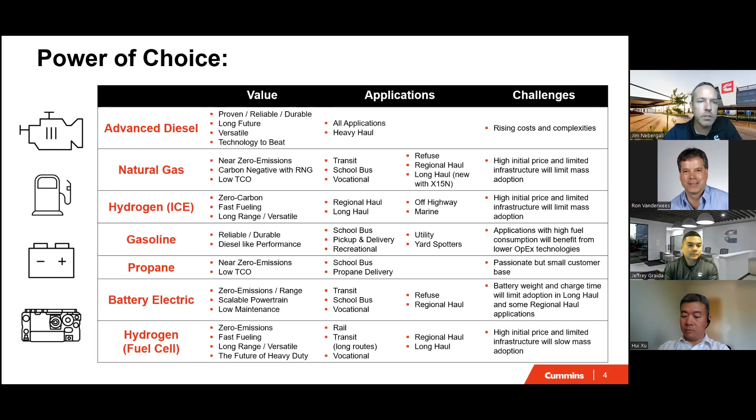We are investing in a number of different powertrain technologies: advanced diesel, natural gas, hydrogen internal combustion engines, or ICE - you'll hear us use that phrase throughout the package as shorthand, since internal combustion engines is a mouthful. We're also investing in low NOx gasoline engines, propane engines, battery electric, and hydrogen fuel cells.

It's important that we recognize the diversity of investments we're making, because you are all going through very similar things yourself. There isn't a single solution that will be the power provider of the future. It's really hard to replace diesel - it's quite versatile. So it's going to take an array of solutions, as well as low carbon fuels, to achieve the climate change goals we're all trying to achieve.

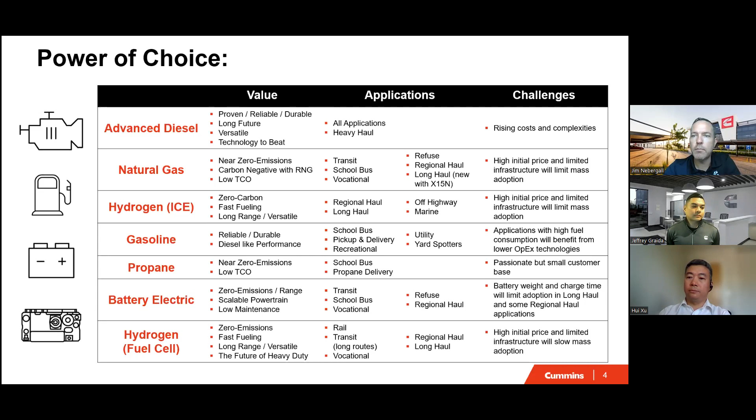Hydrogen fuel cells have 100% tailpipe reduction of CO2. It also has 100% reduction of NOx emissions. It is also more efficient, in the 10 to 15% range from a fuel bill perspective. So it is a great technology - there's a lot of value in hydrogen fuel cells, and it's one of the many technologies Cummins is investing in.

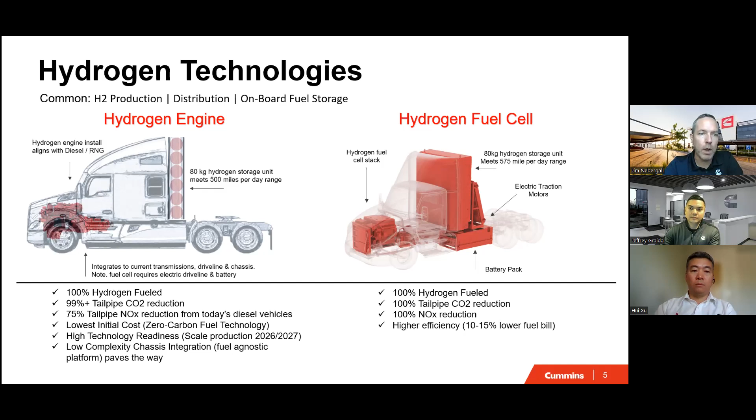The final comment I'll make here is that you'll see a number of images of North American Class 8 trucks in the package. That's just because that was a graphic that was available, but it's also an area of the market that's developing quite quickly. That doesn't mean the technology isn't applicable quite broadly wherever diesel engines are used, and we'll be talking about that as well today.

So Cummins has announced that we're working on two hydrogen fueled internal combustion engines, a 6.7 liter and a 15 liter, for global on-highway and off-highway markets.

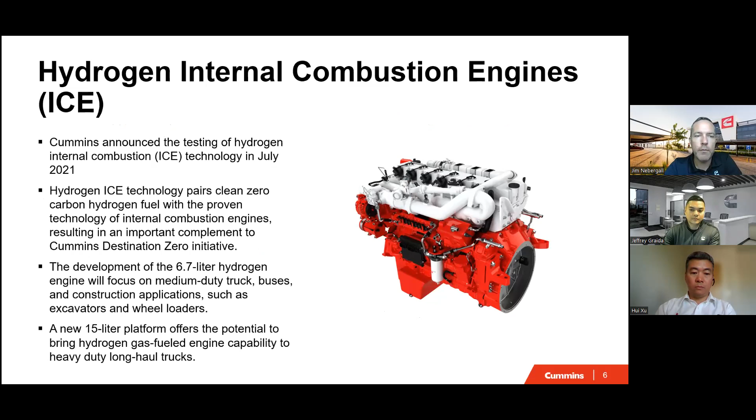And as we look at this technology, you ask why, why are we doing this? Essentially, Cummins and the industry are all working towards a common goal, and that's decarbonization. However, significant uncertainty exists—uncertainty on which technology is the right technology, when different technologies will achieve maturity, when fuel prices will come into the range of viability, and fueling infrastructure. So there's just a lot of unknowns.

Cummins is actively exploring the hydrogen engine and building market interest because we see it as a very practical zero carbon fuel technology. It takes a lot of what we know and adds a new element, hydrogen. That's the new key here—the rest of the system has significant industry knowledge around it.

And so we also feel that investing in multiple zero carbon technologies is critical to ensure customers have options and competition exists. And finally, we're receiving a lot of interest, and that's because of the low initial cost and commonality with current powertrains.

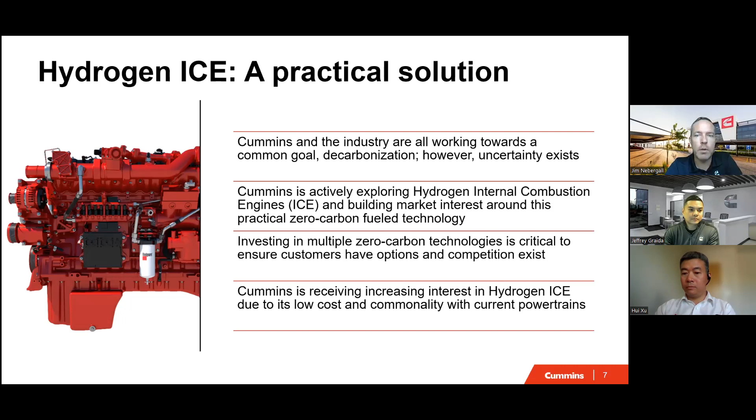But there's also a place where, depending on how the asset's used, a battery electric solution isn't practical. It could be range, weight, duty cycle, or access to infrastructure—a lot of different reasons. And we need other technologies to pick up. We see those technologies as zero carbon technologies: hydrogen fuel cells, hydrogen engines, renewable natural gas, renewable propane, renewable diesel. There will be quite a lot of diversity, but like I said earlier, we need that because of how we have to replace fossil fuel-based diesel, which is just ubiquitous. It's low cost, reliable, very versatile, and so it takes a lot of options to overcome and fill the full space for our applications.

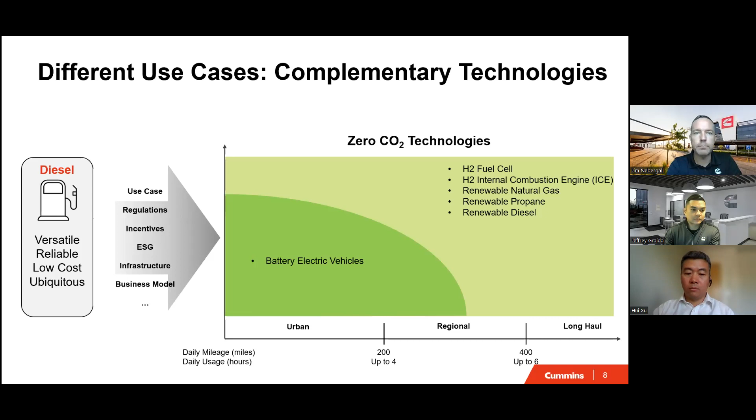So we're aggressively pursuing two engines in that space, one at the low end of the chart on the left, one at the high end on the right, so a 6.7 liter and a 15 liter engine. We're looking at it globally. A number of markets are under review, and this changes quite often as we work with customers, OEMs, and users on the technology.

As the market grows, I think there's also an opportunity for an engine in the middle between these two. Cummins has them in our portfolio, and that could also be something that follows these two, but these are really kind of in the lead, I would say.

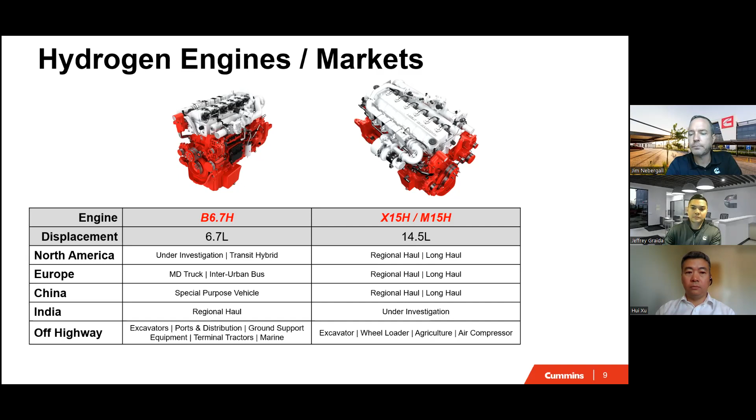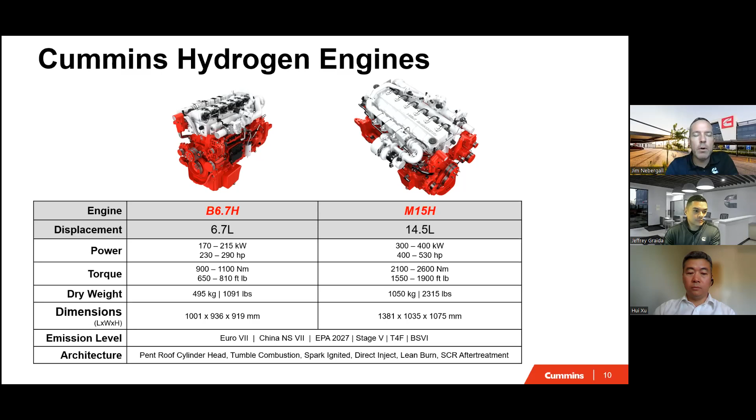The power and torque numbers, like I said, are quite similar to their equivalent diesels today, and that's really for two reasons. One, these are based on Cummins' new global platforms that have entitlement efficiencies, entitlement weights, and really low friction. So these are new, very modern engine platforms designed for the future, and designed in a fuel agnostic way, which we'll talk about next.

So one key is these are new platforms with a lot of capability, and the second is the architecture Cummins is using. Our hydrogen engines will have a pent roof cylinder head with tumble combustion. These are spark ignited engines with direct injection. They're lean burn, which means they'll have more of a diesel-like aftertreatment with SCR. But this direct inject architecture, coupled with these platforms, gives us very high efficiency as well as really capable power and torque.

The competing technology is a port fuel injected version, and you'll see things in the press from others. They are investigating port fuel type architecture, but that won't deliver the power and torque we believe. So we're really excited about having this competitive architecture out of the box.

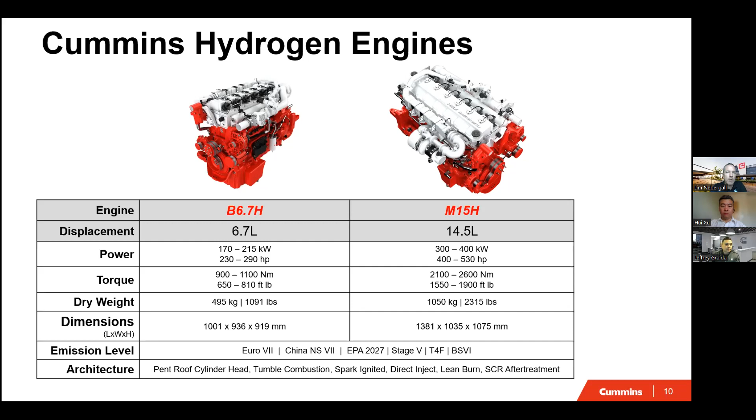Like I said, these are based on Cummins' new fuel agnostic platforms, and what this allows us to do is have very common engines from the cylinder head down. So we can drive a lot of global scale, reliability, and durability on these common components that are shared between diesel, natural gas, hydrogen, as well as gasoline, propane, any fuel we want to use.

The base engine platform is common, and then we have a different cylinder head and associated components to handle the difference in fuel. That's a great story for global reliability and durability, as well as installation commonality, because once it's installed in a chassis, the switch between fuels involves a lower integration effort. It's more about the fuel system and getting fuel and onboard storage to the engine, but there's a lot of commonality in the platform.

In the case of hydrogen, we will typically see things start their life as a diesel. Maybe that progresses to spark ignited through natural gas and then ends in hydrogen, but each platform will take somewhat of its own journey, though the concept holds around commonality from the cylinder head below.

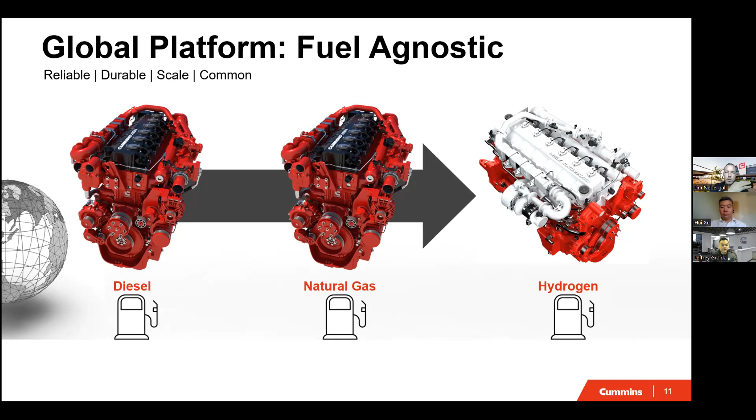So as we start to explore why hydrogen ICE a little further, we do feel that fuel cells could be a long-term solution for decarbonization in many applications. It's just that a hydrogen ICE provides a really complementary short and medium-term solution. First, it starts with the fuel - it's a zero carbon fuel technology.

Also, we can go fast. We can be in scale production mid-decade, and that's just because of the maturity of the technology. We're working in an industry that has an entire supply base ready to go for an engine. We can produce at scale levels, as well as the vehicle integration points and vehicle accessories. The industry is set up for this. We can go fast with it, and it can be in production in a very reliable, controlled way.

There's a lot of benefits for the end user as well. Like I mentioned, the initial low cost compared to all of the zero carbon fuel technologies. It's also a drop-in replacement with respect to their operation. It's very familiar powertrain technology, vehicle technology, and maintenance practices - it still requires oil changes, things like that an engine would require. So very common to current practices.

We also hear from customers about a single fuel supply switch. As an end user, they're trying to figure out what's my next thing. And they want to pick, if they move to something, they don't want to have an intermediate solution and then have to change again. That's just a lot of work.

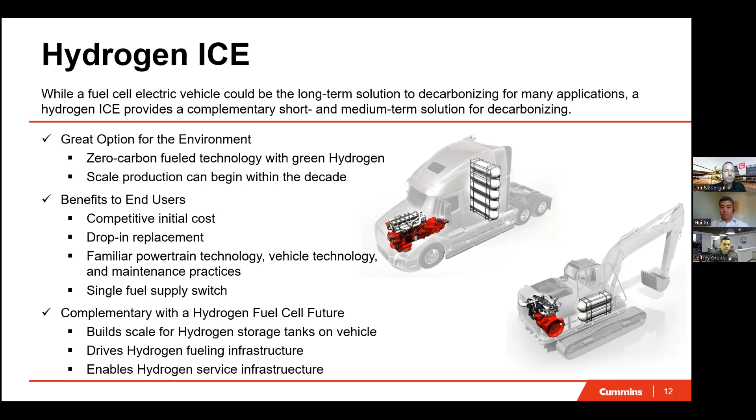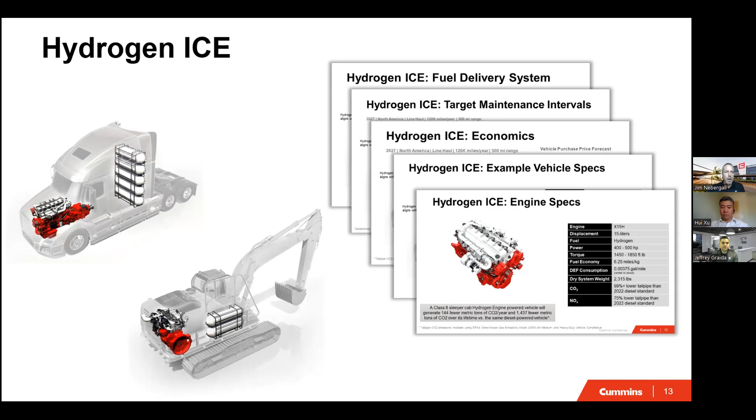So we have a lot of data on various elements that we'll start to walk through at a high level, but I'm going to happen to use the 15-liter example in most of these, and it'll happen to be mostly an on-highway example as well.

So 15-liter engine, the specs are common to the Cummins 15-liter efficiency series, 400, 500 horsepower, torque in the 1450 to 1850 range. Fuel economy is route dependent, but we think it'll be about 6.25 miles per kilogram of hydrogen.

Because we'll have a diesel-like aftertreatment system, there'll be an SCR. The DEF consumption rates will be very similar to diesel. The weight you can see of the engine, the dry weight, is here.

This is the new 15-liter platform from Cummins, so it actually has quite a bit of a weight reduction from the current X15 efficiency series that you know and love today.

I already quoted the CO2 and NOx reductions, and there's a little box on the left. If I use the EPA's greenhouse gas emissions model and estimate the savings, CO2 savings per year from a hydrogen internal combustion engine in a typical Class 8 truck, that's a lot, right?

There's 1,437 fewer metric tons of CO2 over the lifetime, and 144 fewer per year. So significant savings that can result.

I mean, this is the same number you would get from a battery electric or a fuel cell. So dramatic savings, and for OEMs, for the truck makers that actually have to do greenhouse gas modeling and hit certain criteria and levels in that model.

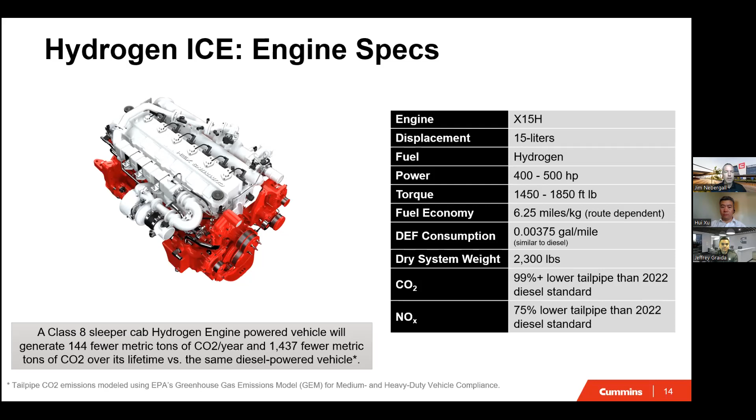This provides them a fantastic lever to help with their CO2 reduction targets.

We'd be speccing it for a 500-mile range. You can get larger ranges, it's just more tanks, and that adds costs, and we'll talk through that in a little bit.

Base engine warranty would be no different than a diesel. And also the durability is the same. That question comes up a lot.

The engine goes through the same validation, the same what we call standard work at Cummins to validate any engine. So there's no difference because of the fuel type, and it's based on a lot of the diesel components anyway.

The vehicle weight, this vehicle would be about 2,500 pounds more than a diesel. And today there's already an allowance for natural gas vehicles, a 2,000-pound allowance from the Department of Transportation, so that you're not penalized from a cargo perspective because of the increased powertrain.

So an 80,000-pound vehicle can actually haul 82,000 pounds if it's a natural gas vehicle. We expect the same allowance, and we're working on that actively to get that allowance for hydrogen so that you're not penalized for the additional weight.

And you might say, well, why does this weigh more than a natural gas vehicle? It's really the tanks.

That we'll talk about in a minute - the tanks are higher pressure. They have capacity to store fuel at a higher pressure. Therefore, there's more carbon fiber windings on the tanks, and then they weigh more.

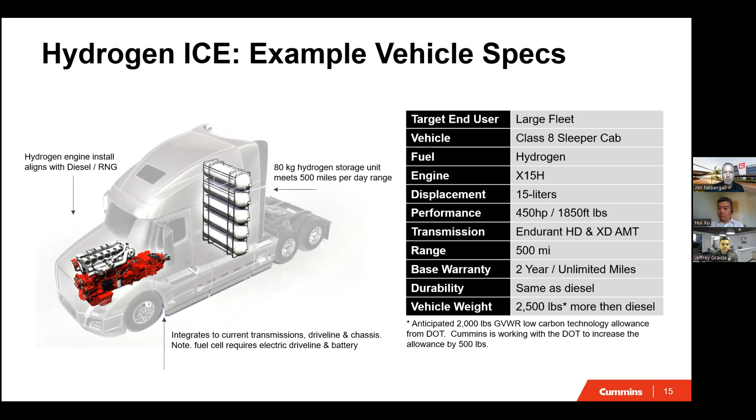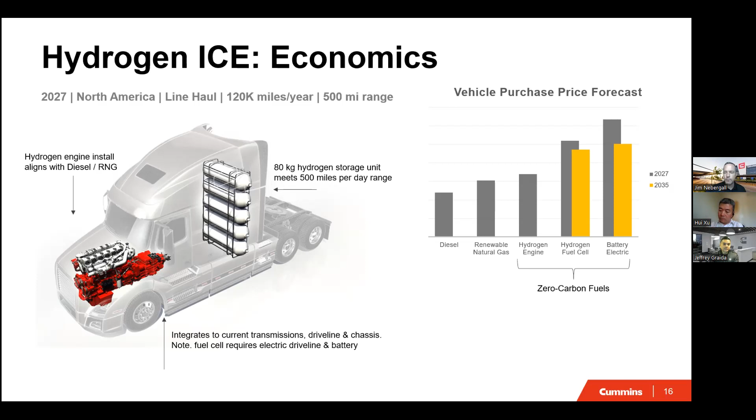We believe there will be a DPF. There's very, very low soot generation, but we're working through the studies now to understand what the filtration requirements would be, and then what the cleaning frequency would be, if any. But there's a DPF maintenance lamp today with our products, and it would likely be there tomorrow too. We just don't have a range yet that we could forecast. But otherwise, it's very common with internal combustion engines, diesel or natural gas.

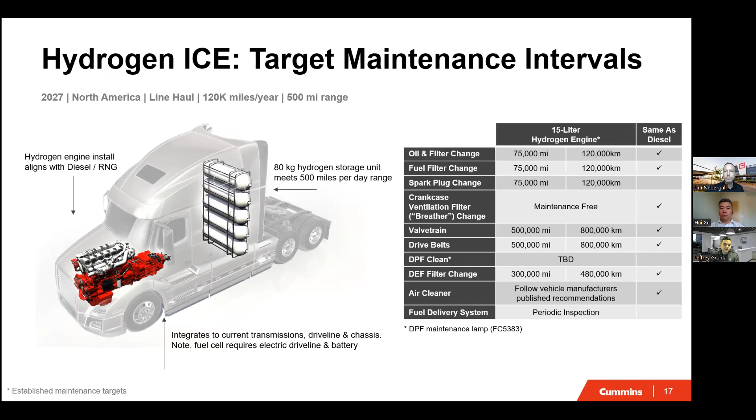And then the fuel delivery system - like I've said a couple times, the fuel delivery system, the storage tanks, the high pressure lines, the valves to reduce it down to pressures that the engine would need, are compatible with both hydrogen engines and fuel cells. I think that's a great point for a vehicle integrator. As you integrate hydrogen, you're integrating it once, and it can be leveraged for both an engine or a fuel cell, so the re-engineering doesn't have to occur two times. If you commit to a hydrogen vehicle, you've got options to do engines or fuel cells.

These are type 4 carbon fiber fuel tanks. For storage pressure, typically I'm seeing two nodes develop at 350 bar and 700 bar. We're seeing fueling stations kind of support those two different pressures. On the vehicle, to me, it's just cost and range - the 700 bar will cost more, but you get more range. I think it's more application dependent on what you would want to do. But those are two - at least I hesitate to say standards because I don't know that that's really true - but there seems to be alignment, and people talk about those two pressure nodes.

Those are much higher pressure than natural gas is today. Natural gas, I believe, is more like 150 to 250 bar - that's just based on memory.

And then configurations, you can see the back of cab structure here. There's also options for saddlebag where the diesel fuel tanks may have been, at least in this image. And then I think there'll be a lot of custom things depending on application.

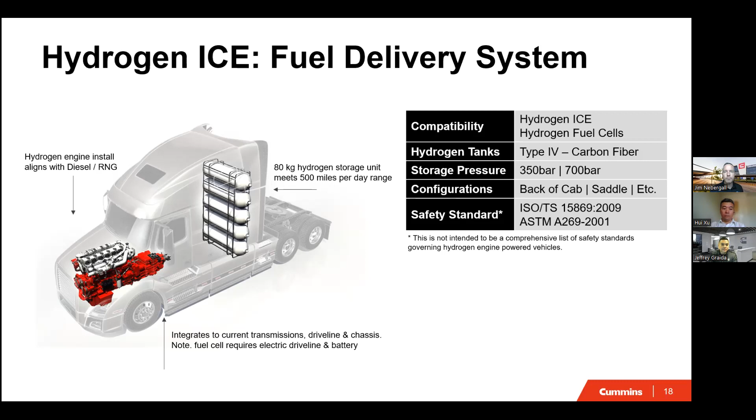And so we've talked a lot about engines, but I did want to raise awareness that Cummins also participates really in the entire hydrogen value chain. We have hydrogen production technology with electrolyzers. We do have hydrogen storage at very high pressures, 1,000 bar for stationary storage, as well as mobile 700 bar. We have experience with dispensing. We also have both consumption technologies in our portfolio, be it fuel cells or hydrogen engines.

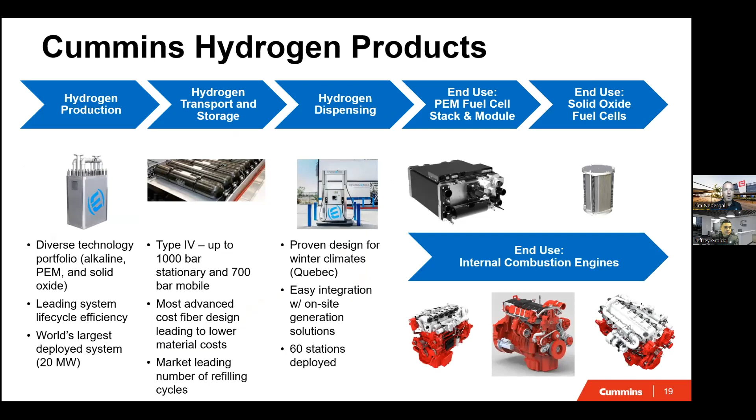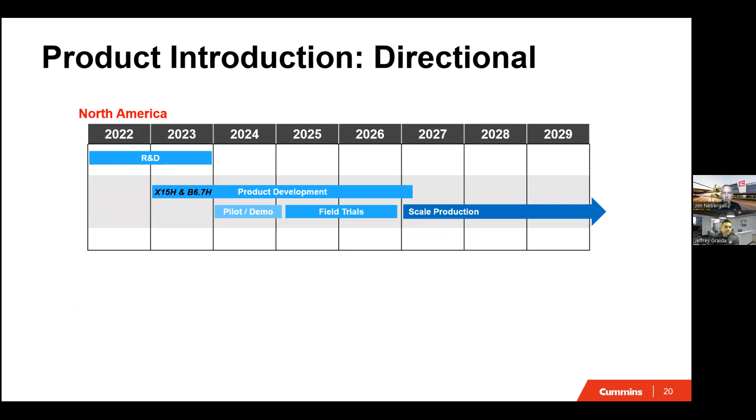And then from a product introduction timeline, the timing is a question that we get often. So to help facilitate that, I've added a directional thought that we have, at least for the North American market, for US, Canada, is that we are in the middle of our R&D work now, and we're looking to kick off our product development cycle early next year, for both engines, our 15-liter and the 6.7. We expect to have pilot level and demo level vehicles and equipment running in 2024.

But this is in the 1 to 10 just globally. And then we would move into our typical field trials in the 25 to 26 timeframes as we're leading into full scale production in 27.

So this is a rapidly evolving scenario, I'd say. There's a lot of uncertainties that still exist. We don't have final emission regulations yet for 27 in North America from the EPA. So there's a lot that's in flux, but this is directionally where we're headed. I just want to make sure you understand it could change as we learn more. And also it depends on customer interest, OEM interest, and also end user interest for this technology. But this is something that we are considering a launch around the 27 timeframe, full scale at capacity.

This isn't, when I say scale production here, I'm not talking hundreds of units. This is capacity of 10 to 20,000, just depending on what the market needs. First fit, you could order it from an OEM. These aren't aftermarket upfits or anything like that.

Yeah, if you can go to the next slides, please. So some of them Jim already covered, but realize we never defined what's a hydrogen engine, right? I think for this audience, probably we don't need a definition. The hydrogen engine essentially is the engine burning hydrogen as a fuel, essentially, right?

So for the technology we are developing here on the hydrogen engine, we think it's a spark-ignited engine variant. For that matter, it would be similar to natural gas and gasoline. And in terms of the combustion process, it's more different from diesel, right? But with that, it can utilize the existing installation capability in the engine and component manufacturing. We think this is going to extend the internal combustion technology to beyond 2040.

I have two tables here, and Jim already touched many of the aspects of things. I wouldn't repeat everything he has already said. But on a high level, you look at it between diesel, hydrogen, and other spark-ignited engines, you would share the same block and installation parts, right? So the vehicle integration aspect, the durability from the base engine, you're going to enjoy that from the diesel engine's durability.

However, the hydrogen engine, our technology development was based on the existing spark-ignited engine like natural gas and gasoline, right? So we will use the cylinder head from those existing technologies and tailor it for hydrogen.

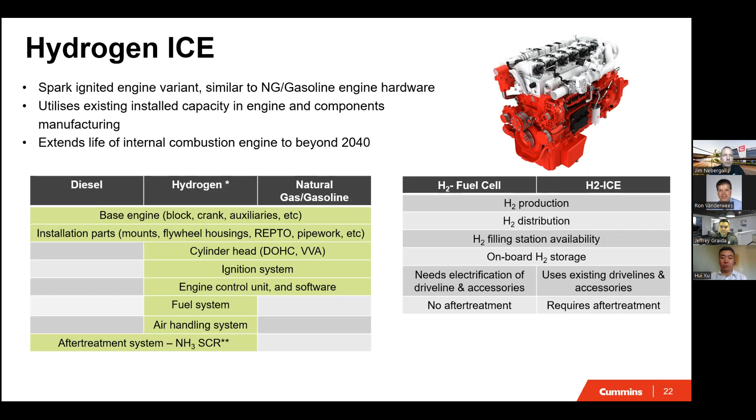So this slide, I'm showing a lot of technical data. I do not plan to go through each one of them, other than I will highlight some unique properties on the hydrogen, and those properties are relevant for the coming hydrogen engine architecture discussion. So let's go through that really quick.

I divided those properties into two sections. One is thermophysical property. For example, there's no carbon in the fuel. For that reason, it's considered a zero tank-to-wheel greenhouse gas technology. It has a really high mass-based lower heating value, almost 3 times higher than other conventional fuel you would use today on the market.

If you have access to liquid hydrogen, it's going to give you really good mileage range. We don't see that going to be mainstream anytime soon. But because of the high mass-based lower heating value, that's one of the reasons even NASA uses liquid hydrogen as their rocket fuel. So that's one very unique property of hydrogen.

For ground transportation, we think that gaseous or compressed hydrogen most likely would be used. As a gas, though, hydrogen has a very low volumetric-based lower heating value. That's our major consideration when we design the hydrogen engine fuel system. Another thermophysical property is the air-fuel ratio is high, meaning for the same mass of fuel you need more air. That's a direct impact on our air handling design.

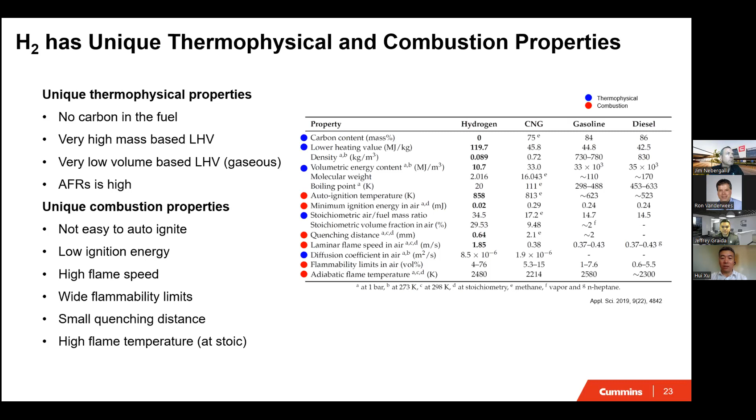Now, hydrogen direct injection has a really high gas velocity. To put this in perspective, the gas velocity close to the injector could reach around Mach 3—comparable to the world's fastest airplane you can find today. So it's a really fast gas injection into the cylinder, into relatively quiescent air in the cylinder. How can you make sure they mix really well? That's the challenge, and we have a really good handle on that.

I mentioned the pre-ignition and knock propensity. We have a really dedicated ignition technology team, with dedicated coil design and spark plugs so that we don't introduce unnecessary ignition to the charge. We also have a really advanced base engine for spark-ignited engines—cylinder cooling to reduce hot spots, hot residuals, and cool components to prevent pre-ignition. We're sort of standing on the shoulders of giants in this case; we have a really good base engine to start with, but we keep improving even from there to prevent pre-ignition and knock.

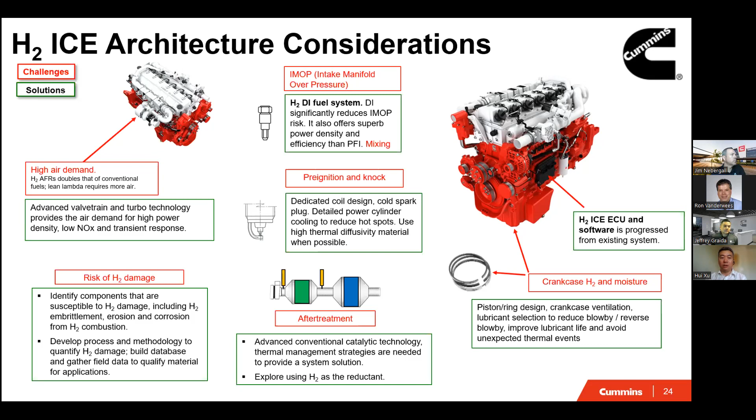However, there isn't a national or international standard for how you make an assessment on hydrogen damage. So what we are doing is working with world-class research entities, trying to develop this assessment methodology to make an assessment and build the database to accommodate field test data, so we can qualify the material to mitigate the damage, because the goal is to make hydrogen technology a durable and feasible technology for our customers.

I have to point out we didn't really change the power cylinder yet. We took the base engine, put in the direct injection fuel system, and also installed an advanced air handling system, and with that we can meet the power and torque target with no problem. So that's really encouraging.

But we didn't stop here. What we are doing next is continuing to optimize the power cylinder design so we can achieve even better direct injection operation. And we will be balancing or optimizing the power density, efficiency, and emissions by improving the air handling system—so this is system level optimization.

And we definitely are working really hard to develop the emission solutions so we can achieve global emissions compliance. With that, thank you for your attention.